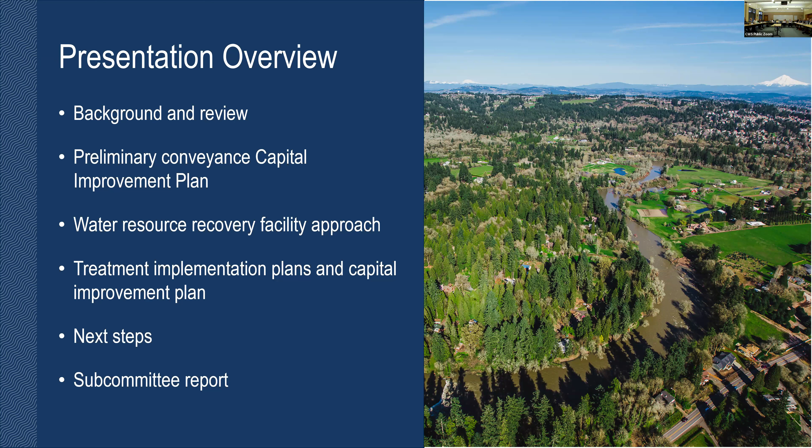So back to the basics. Why do a master plan? It really is a roadmap for upgrading and expanding our treatment and conveyance infrastructure. This plan is done comprehensively. We look at everything as one big system with all of our conveyance and treatment works built together, and how to best move flows and treat within the West Basin. It does not include stormwater or some sub-basin planning or other pieces which are done separately. Just want to be clear on that.

So we have gone through the basin characteristics, the growth, and the future flows. Those are really the anchors for the planning work we have to do to project what's going to happen in the area. What do we see with respect to changes in industrial flows? Where's the growth going to occur? We presented a lot of information on that. Having that sound structure is really key to making this plan successful.

And then we do a lot of alternatives analysis. Do we build a pipe? Do we build a pump station? How do we upgrade the treatment plant? Where do we send the flows, to which treatment plant? So we'll talk a little bit tonight about some of the alternatives, the bigger alternatives that we looked at.

And eventually we put together the CIP, the Capital Improvement Plan. That is the roadmap for the next 20 years, in particular with a real focus on the 5 to 10 year window - what are all the projects that we need to do, and what are the dollars associated with those projects? Those then get turned over to finance and Kathy, and we figure out how we're going to structure these and accommodate the resources we need to deliver those projects, make sure we can be in compliance, and provide the opportunity for our area to grow and protect the watershed while we're doing all that.

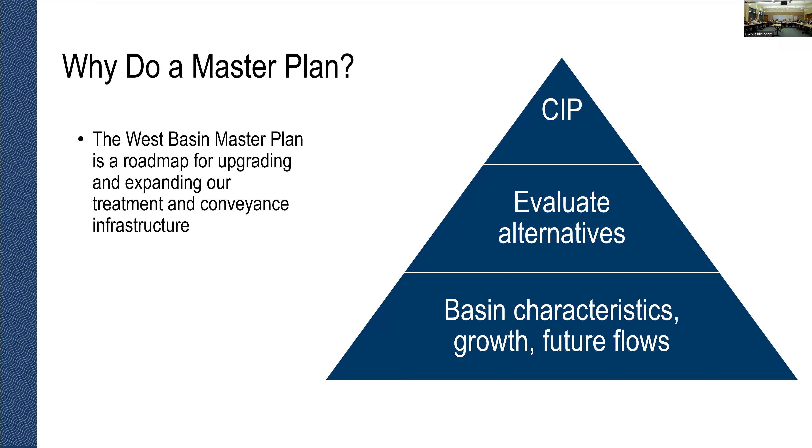So just the brief background to orient everyone. We have an East Basin and we have a West Basin. The East Basin plan was completed a couple years ago. They both address some common themes: how do we deal with climate resiliency, seismic resiliency, and a lot of regulatory challenges that we predict will come in the future. PFAS, the forever chemicals that are in the paper a lot, are something we've spent time figuring out and trying to plot our position on how to best accommodate those needs. So the East Basin's done.

The West Basin has 3 treatment plants. I'm going to try - my pointer doesn't work. One in Forest Grove, which is where our wetland system is, our natural treatment system. One in Hillsboro, and then our Rock Creek facility, which is our biggest facility in the West Basin. And that accommodates a lot of the industries that we talk to.

It's really important to know that there are lots of member cities in the West Basin, and Joe could rattle them all off real quickly, backwards and forwards. We've met with them at the beginning when we were doing the basis of planning. We'll be meeting with them over the course of the next 6 weeks so they understand our recommendations, and they know what the needs are for the cities and where their capacity bottlenecks are as well.

If there's questions for any of us while we're talking, feel free to ask them.

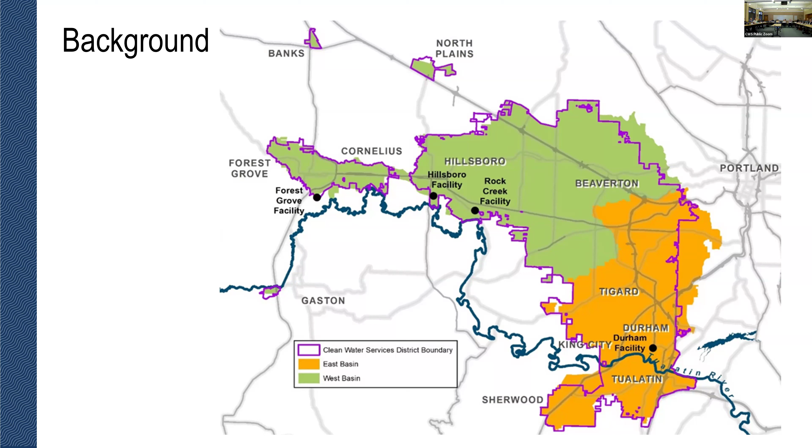Ramesh: If you go back to the previous slide, what are those two little independent islands there about - Banks and North Plains - and what happens to the space between them, like Cornelius and so on? Response: That's farmland. The space between - yeah, so we convey the flow from Banks and North Plains into the West Basin. Does that answer your question? Okay, yeah. All right, and so those green areas are part of the service area that we provide full conveyance for. We take their flow and we ultimately treat it. I see, yeah, okay.

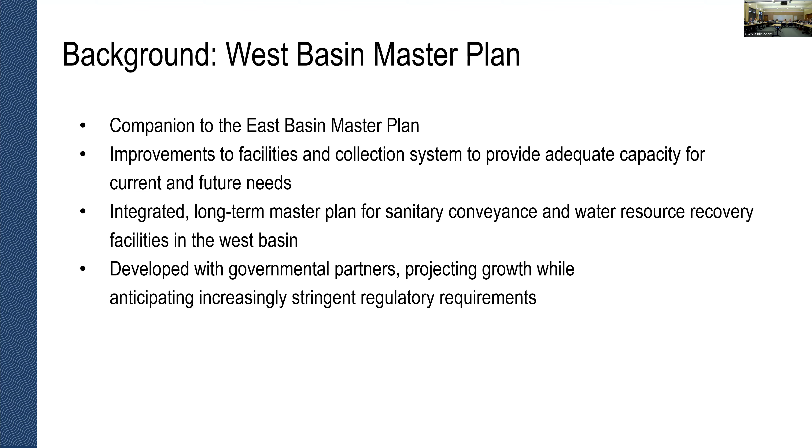Okay, so with that, I'm going to turn it over to Wade, and he's going to talk about some of our conveyance. Thanks, Rick. I'm Wade Denny, the Conveyance Engineering Division Manager. I'll be talking about our conveyance plan that we put together as part of this overall facilities plan.

I want to start with a little bit of a timeline here. As we start these plans, we have to walk down a path to develop our criteria that allows us to start looking closer at what's coming towards us, what our constraints are, and then we get a little deeper where we dive into some of the capacity mapping. We do a lot of modeling to figure out our capacity. This helps us really drive in the needs that we have in our system and understand where we have deficits.

Then we factor in another layer, which is our I&I analysis. If you don't know what I&I is, I don't expect you to - that's inflow and infiltration. That's the water we don't want in our pipes, the water we want to keep out. We look really closely at that because sometimes that's a really cost-effective solution for us to take out capacity by eliminating that water in the upper basins.

And then we start playing with the alternatives. We start developing alternatives - I think we had 5,000 or 6,000 alternatives we put together. We used a lot of different ways to review those alternatives. Ultimately, we were able to rank those and develop these alternatives we want to push forward into the capital improvement plan, which leads us here today to start talking about that.

We do have our next steps, which is developing some more tools to help us track where we're at in regards to some of these capacity limitations, and also broadcast more of what we're doing, and track the capital expenditures associated with this plan.

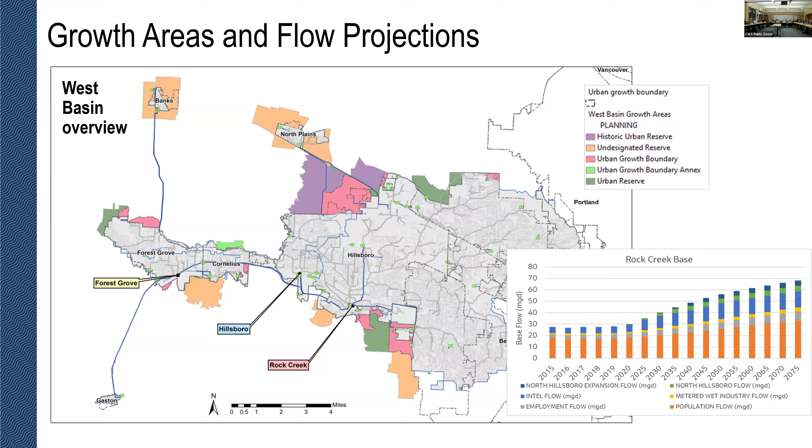The next big part of looking at cost-effective investment is our R&R program, our repair and replacement program. This program looks at the existing useful life of our infrastructure. On our pipelines, we have defects and a useful life we can calculate based on current condition. We use that to form a plan that allows us to look at what we can expect to spend on just replacing our existing pipelines. This isn't replacement for capacity reasons, it's just because these pipes are aging out and we want to serve our public effectively. So we look closely at that to understand the effect it can have on us.

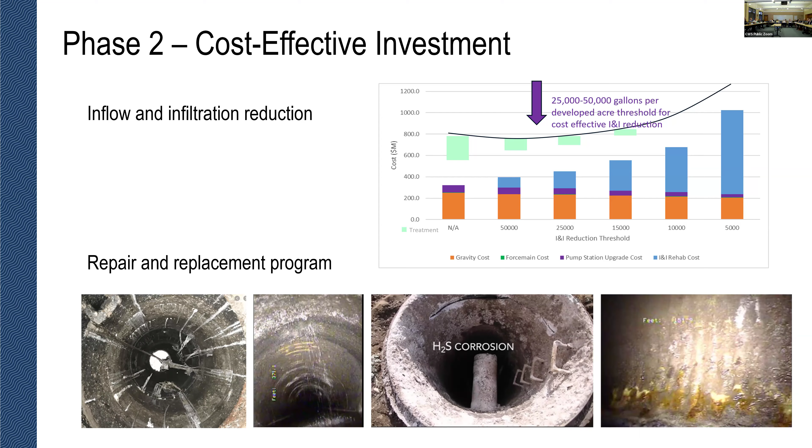Resiliency was another big objective. We know climate change is happening to us. Here in the district, we've seen different storms come through, so we wanted to look at our design storm. This was an effort that took a lot of staff time to look specifically at current storms we're seeing and what those models show for the future.

Was there a question?

No, keep going. When we looked at that, we saw that we were going to need to increase our design storm by adding a little more volume and also a bit more short-term intensity as well.

The next big thing is seismic. We live in an area susceptible to a Cascadia subduction zone earthquake, so we want to be prepared for that. A lot of being prepared is just understanding what we have in our system. We know we have areas highly susceptible to landslides and liquefaction. Our pipelines are located near creeks most of the time, which is a good area for liquefaction or landslides to occur.

So we want to be prepared as we move forward with project design to understand those constraints and look at them closer, but also design fail-safe ways to actively plan for failures so we can quickly get back online, by creating slip joints and other features that allow us to plan and get back online within a short amount of time, given the potential for a big event like this.

This walks us down the path we go through as we're developing the plan itself. We start by looking over these alternatives. Like I mentioned, we have about 5,000 or 6,000 alternatives. We start looking at those at the capital cost level, then we look closer at their life cycle costs. This helps us understand the investment we're going to see annually in order to serve these assets.

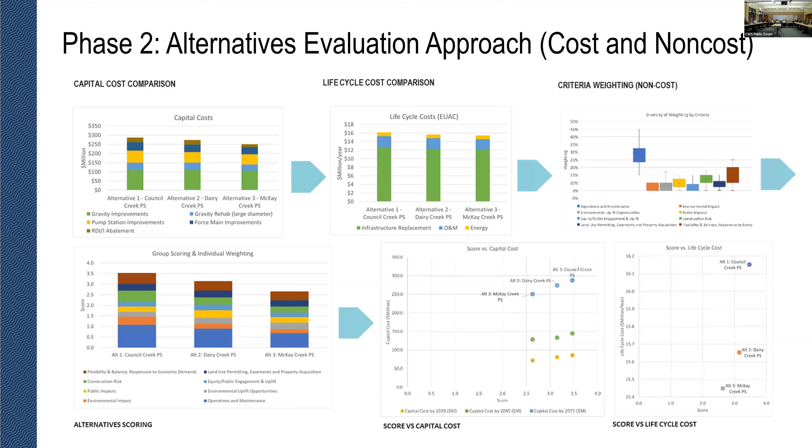Any questions on this slide? Keep moving through. So after looking at these alternatives and different ways to approach these solutions, what we came up with was a plan that maximizes our flows to Rock Creek. This allows us to transfer some flows off of several trunks that are more capacity limited right now and free up that capacity, which allows us to avoid some major improvements on these big trunk lines, and serve areas that are potential to grow with flexibility, like North Hillsboro, for example.

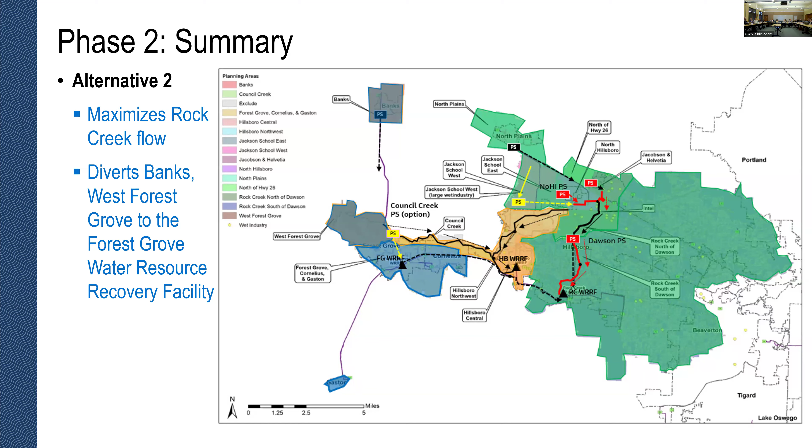Our biggest project right now identified in the plan is our Beaverton Interceptor. This is a large project driven by existing growth as well as I&I influence and future growth. We have a plan in place that allows for I&I reduction, and also a plan to evaluate how that I&I reduction has changed the need to size this pipe. So we're looking at a range of sizing for this pipe based on how effective the I&I reduction is ultimately. We also have backup projects in place, like these off ramps that allow us to change how we're delivering flow in case we get a big user upstream and need to send that flow directly to the plant faster than we can make all these big gravity improvements.

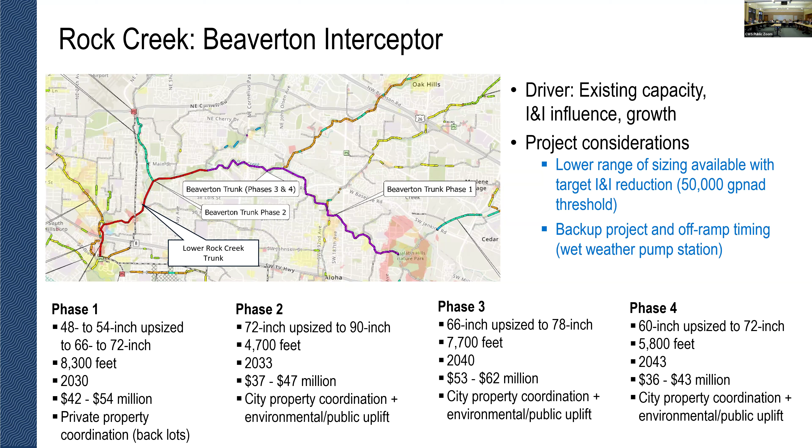Because these are big investments, Phase one we're looking at trying to have online by 2030, projecting up to about $54 million for that project. Phase two, we want to have online by 2033, close to a $47 million projection. Phase 3 and 4 are both large investments, getting those online by 2040 to 2043. So these are big undertakings that will disturb a lot of residents—some of these pipelines run through people's backyards, so they'll all be tricky projects. I wanted to broadcast that today.

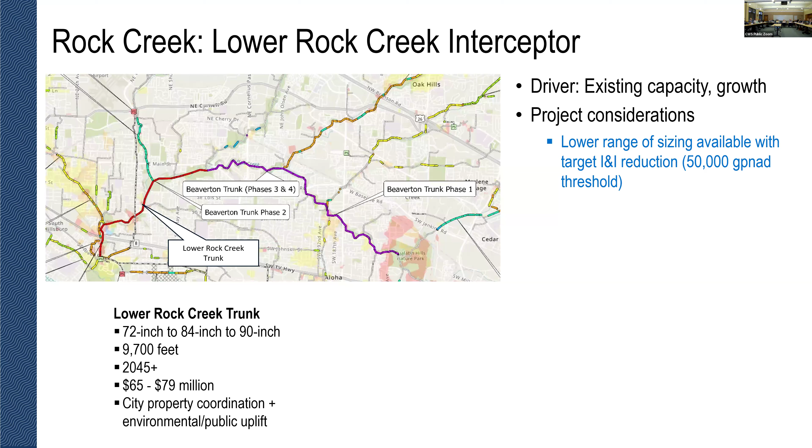Our Lower Rock Creek Interceptor is one of our next largest planned projects. This is our lower system that connects directly with the Rock Creek plant. We're looking at having to make improvements on it by about 2045. This will all depend on the range of I&I reduction we can see upstream, and it's looking to be about a $79 million investment at the high end of our estimate right now.

Another important project to us is our Turner Creek project. This is a project where there's existing capacity limitations that are pretty pronounced right now, things we're watching currently. So it's an area we weren't surprised to see come up on this plan. But there's some I&I influences associated with that, and part of this project is doing some I&I abatement to help mitigate that and maybe decrease the sizing of some of that downstream conveyance pipeline.

But you can see the different phases. We're recommending 4 phases on this project. First phase online by 2030, phase 2 also online by 2030 — these are the 2 most important areas to improve. Then phases 3 and 4, 2035 and 2045, are a little more spread out because we're going to do some I&I abatement in between phase 2 and phase 3. That will allow us to right size phase 3 and 4 for those pipelines.

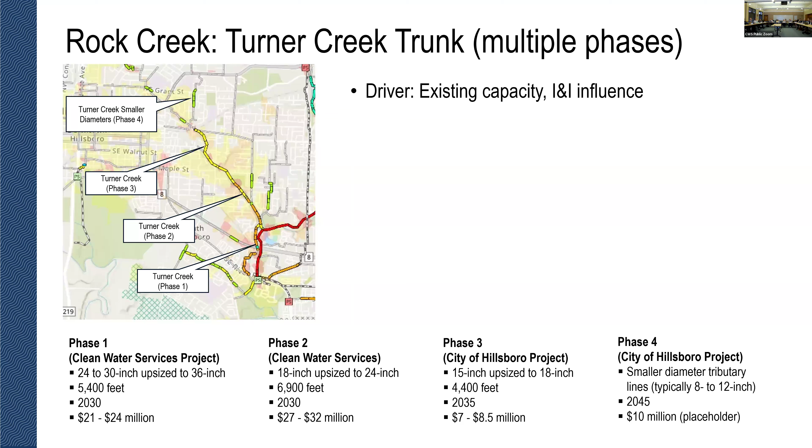Our Dawson pump station expansion and Dawson Trunk — this project is driven by industrial growth. Intel is one of the big users up in this area. It serves the Brookwood area of Hillsboro. We're looking at having this pump station expanded by 2032. It's going to be about an $11 million hit to make that expansion happen.

Our Dawson Trunk is another one. It's an existing 24-inch, and we're going to upsize it to 42 inches. We want to see that online by 2040, and it's going to be about a $16 million investment right now.

So a question on the industrial — can you go back to the previous? So the industrial growth, is Intel the biggest growth? I think there are quite a few other industries there, Genentech and so on — aren't they contributing any to this industrial growth? They're definitely contributing, but Intel is our biggest user in this area, so they have one of the biggest influences on our system in this particular area. And that's considering all the campuses? This is considering all the campuses that are tributary to the Rock Creek Basin, yes. Okay, thanks.

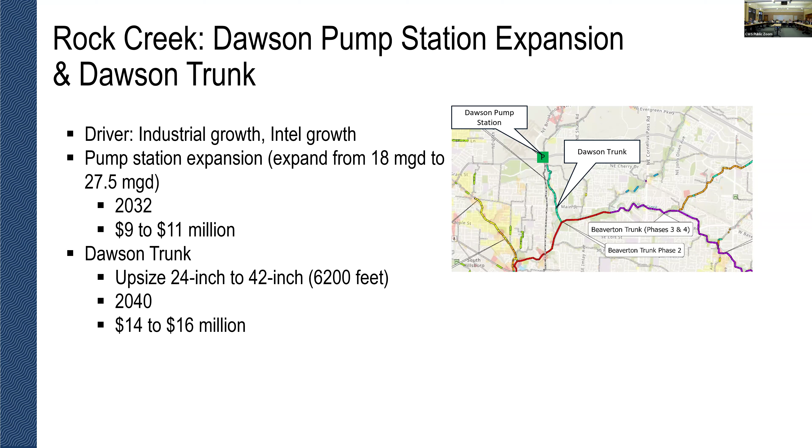We want to do some I&I reduction in Forest Grove as well. This is a pretty large program — we're looking at a $30 million program over 20 years. This is an investment that will let us reduce the improvements at the plant itself, as well as some of the conveyance pipelines that go to the plant.

Our Council Creek pump station and force main — this is a critical one. This allows us to transfer flows, moving flows from what would be going to our Hillsboro treatment plant into our Forest Grove plant. This frees up some capacity in our Hillsboro trunk line and allows us to avoid having to upsize that line. This is a big investment, about $19 million. We want to have it online by 2029.

Our Cornelius trunk — this is one that will do some upsizing on the existing gravity line, as well as some small upgrades to the pump station itself. It's about an $11 million investment. Any questions? Yes, go ahead, Sneesha.

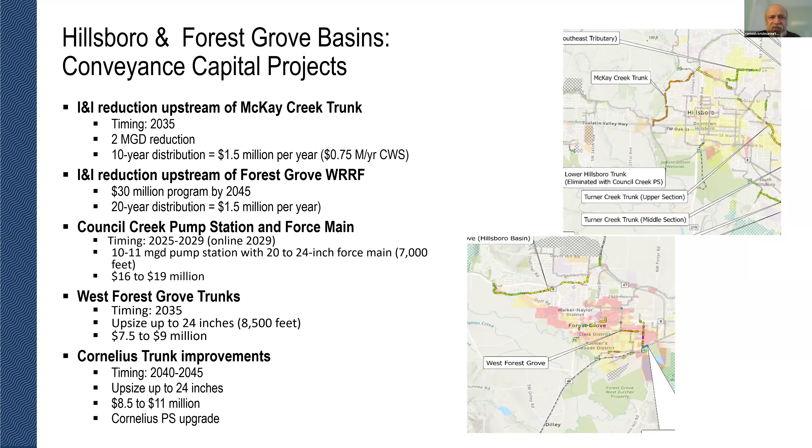Yeah, answers my question, but at the same time, sustaining these projects for that long without any cost escalations is going to be a concern, right?

Cost of construction is always rising. We try to look at this in our planning, so we try to estimate where those are going to be. That's why you see kind of a low and high cost. It's a range of costs where these are class 5 cost estimates, so this is plus or minus 50% on the low end, 100% on the high end. So there's a lot of discrepancy in actually what that number will be, but it's our best guess, a range of costs. It helps us at least to start budgeting for those investments.

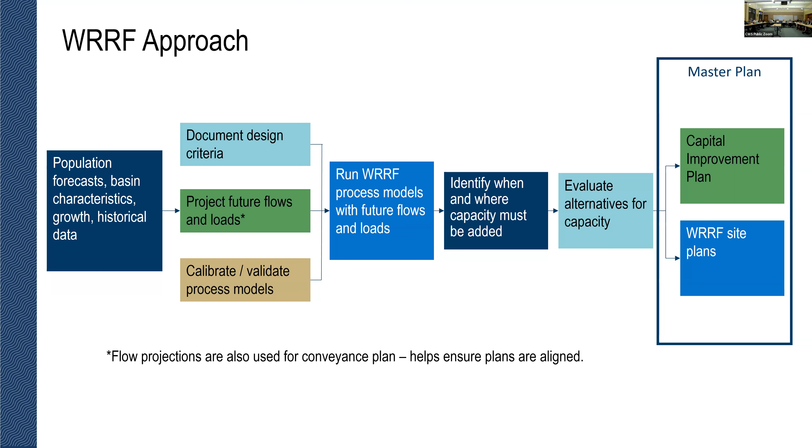So you'll see the term flows and loads in the master plan. Flow is pretty self-explanatory, and there are some processes that are really only flow driven. A good example is a pump station, which really just cares about the volume of water. Other processes are driven by loading, which is the pounds per day of a parameter we need to treat. This can be something like solids or oxygen demand, a measure of the biological activity in wastewater.

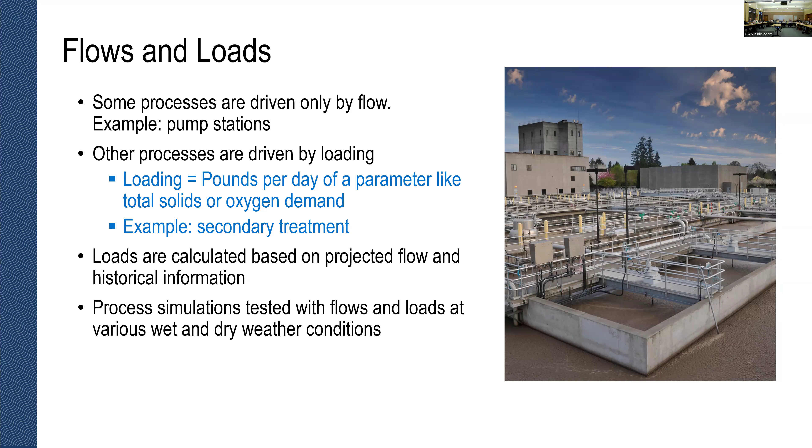An important thing to understand about planning for the water resource recovery facilities is that we need to test out our process simulations at a range of different conditions for both wet weather and dry weather. We have different permit conditions at different times of year, and sometimes a peak load can occur during dry weather, whereas a peak flow would occur during wet weather. So it's not enough to just look at the biggest storm on the biggest day — we also need to look at average conditions over a range of different times of year.

You're also going to see the term unit process a lot in the master plan, which bears a little explanation. A unit process is just a step in our overall treatment process, but it includes everything that goes into that step — treatment equipment, but also buildings, tanks, piping. An example is the primary clarifier process at Rock Creek, where expanding the unit process involved a good amount of demolition work and a bunch of new construction. Sometimes expanding a unit process is as simple as adding a piece of equipment, but a lot of times it's more complex, and we have to plan for the money and the space to do that.

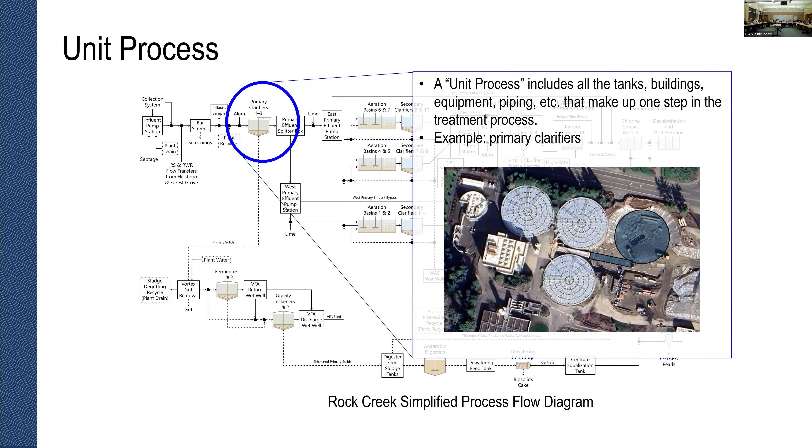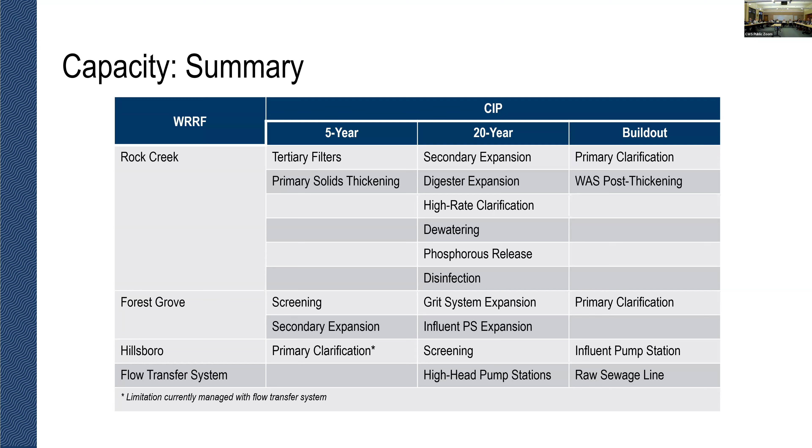So next steps, I mentioned site planning. Long-term site planning is essential for reserving the space for future processes. So now that we know what projects we need to do, part of what we're working on now is updating the layout for each facility.

We also, when we do the site planning, try to figure out what areas we want to reserve. There's a few areas that we block out just to make sure that we don't put something else there, because we think that if there's a regulatory change or some other condition changes, we may need that space for a process that we're not necessarily planning on doing right now, but could do in the future. So that's part of making sure our plan's flexible, so that we're always able to adapt to what happens.

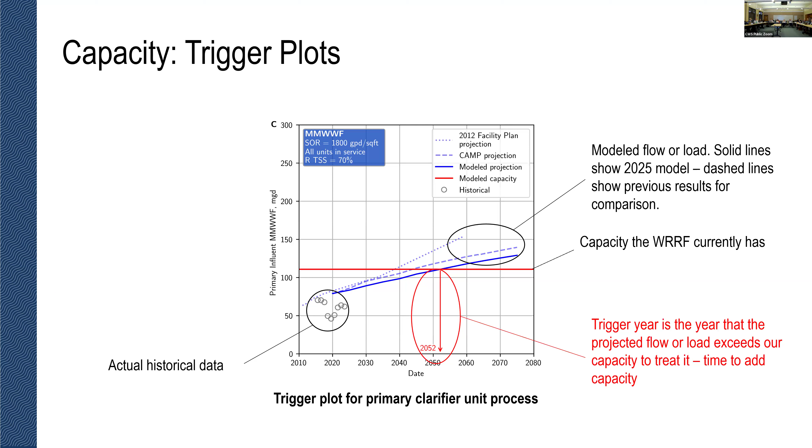Do you have more sensors too in the plant than what you had perhaps in 2012? We do have some more sensors. We're using more kind of digital twin types of things as well to keep making the models more precise and more accurate. Cool, thanks.

So our next steps, again, this kind of mirrors what we did on the conveyance side. Right now we're in the process of either developing or updating our estimates for each of the projects on the CIP, and then once we have those, we'll evaluate timing. Again, the goal is a consistent distribution of costs—so if there's a way to either push a project out or do something else so that we balance it, we have an even investment over time as much as we can.

We also consider aging condition of the equipment and facilities. Most of what we've talked about today focuses on capacity, but we do sometimes need to replace or upgrade a process just because it's reached the end of its useful life. That's information we get by looking at things like the number of work orders in our system, and really just talking to our plant staff and operators and figuring out what's working for them and what's not. Then we go through the process of deciding—should we try to maintain this for a few more years, knowing our maintenance costs are going up, or is it time to think about replacing it?

Looking ahead a little bit, we'll have draft and final executive summaries and plan documents ready. I think we're meeting again in June—at that point we should have a draft of the plan ready for this group to review, as well as a presentation and an executive summary to look at.

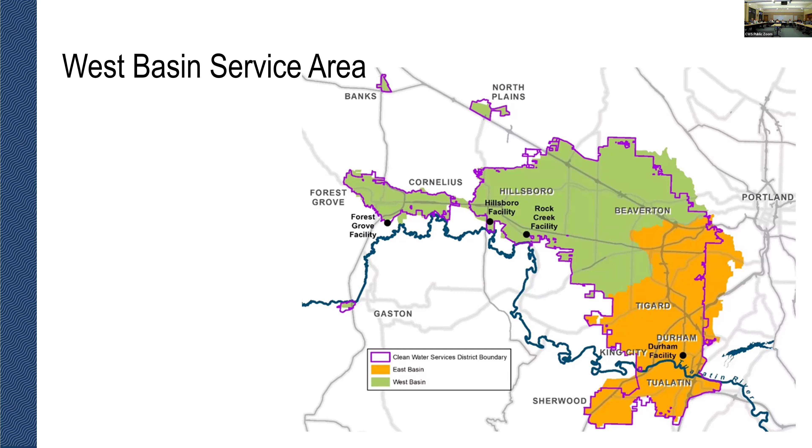And obviously, what's the benefit to the river, since water quality is always a big topic for Clean Water Services and often comes up. There are opportunities to advance or help the environment, the river flow, and the watershed as well. This is just a few slides on alternatives and opportunities to do that while these projects are happening.

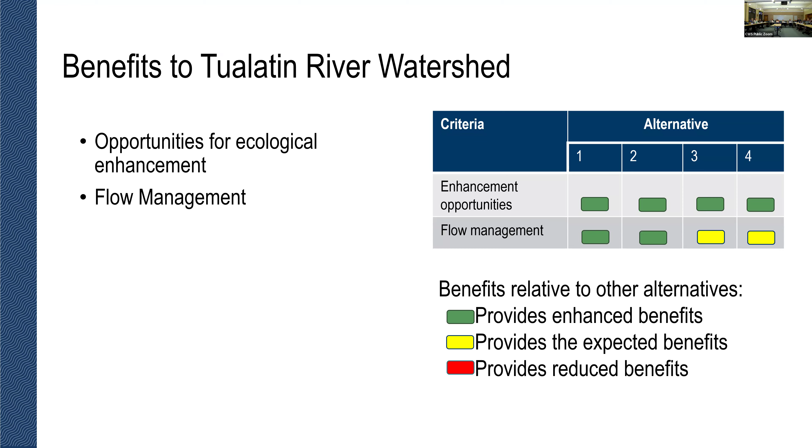That's kind of what I had.

So I think my comments, first off, I just really want to thank the staff, Rick, you and the rest of the team for the time you took and the way you listened, and just the effort you folks put into communicating with us and bringing us along as you talked through the challenges you were looking at. And in kind of typical fashion, I didn't stay within the parameters of how you had originally scoped the project.

So I just want to reiterate, more for the benefit of everyone else here, because I think you folks heard me loud and clear and were very accepting of my comments, that every opportunity we can take through all of these different projects, small, medium, large, to be good neighbors. If that's installing a pump station that's near a bus stop and you can stick a shade tree in there to make it more pleasant for people in the neighborhood, let's always look through that filter of people, fish, wildlife, plants, and the river.